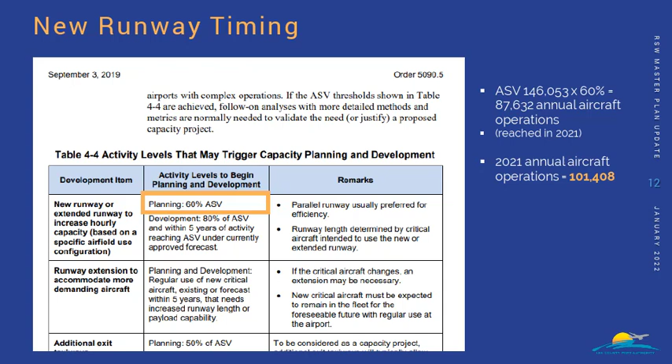The airport previously exceeded that level between 2005 and 2008 before activity dropped as a result of the last recession, airline consolidation, and the upgauging of aircraft fleet, which allowed each aircraft operation to move more passengers. RSW has again exceeded 60% of ASV with the highest level of activity that the airport has experienced in 2021.

Where are we in the process to prepare for a new runway? Significant work has been completed as part of the airport redevelopment program, which included the midfield terminal relocation and preparations for a future south parallel. This includes land acquisition, site preparation, environmental permitting and mitigation, and construction to support the airport's future 2-runway configuration, including a midfield aircraft rescue and firefighting facility, midfield crossfield taxiway system, and a midfield airport traffic control tower.

As we look forward to future actions, it's important to understand how activity is projected to grow into the future. Total operations are projected to reach just over 135,000 operations by 2040. FAA guidance indicates that development should begin when an airport reaches 80% of ASV and within 5 years of activity reaching ASV under the current approved forecast. It is anticipated that the airport will reach 80% of ASV in 2033 and 100% of ASV in 2043. Based on FAA 5-year guidance, development would begin in or around 2038.

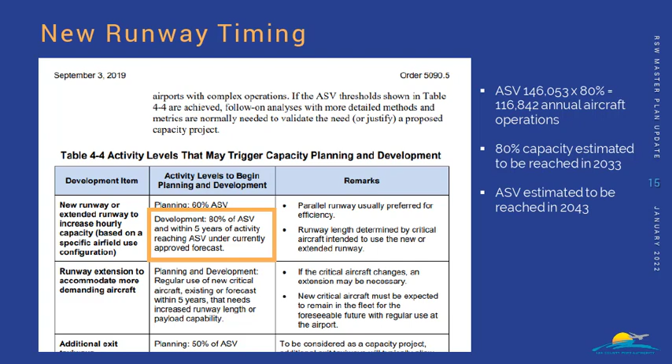Based on the projected activity levels in ASV, actions beginning in or around 2038 would include the FP&L power line land acquisition and relocation, new runway design, the new runway construction, with commissioning of the new runway in approximately 2043. Prior to 2038, there will be ongoing actions related to permit compliance and management, which will allow for the runway development to proceed when appropriate.

I will now turn it over to Pete, who will walk you through the North Area planning effort. Thank you, Mike. The planning process for the North Area's aviation use parcels helped define the near to long-term land use plan and development vision.

The North Area Plan focuses on airport property located between the existing runway and the Skyplex Commerce Park. As shown on this slide, the property currently serves a wide variety of aviation-related uses as well as airport support functions. These uses and functions include the airport's existing maintenance facilities, air freight buildings, general aviation facilities managed by PrivateSky aviation services, airport support facilities and infrastructure like FPL and electric vaults and cell phone towers, and fuel storage facilities. Also considered in this existing conditions inventory are recently sold interests granted to Capstone and Intrepid.

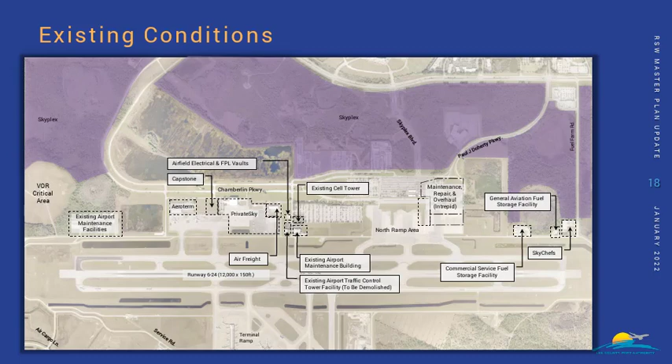As part of this planning process, we benchmarked several airports throughout the country, focusing on medium or large commercial service airports with passenger or general aviation activity levels generally consistent with the fiscal year 2040 projected levels for Southwest Florida International Airport, those which Mike just previously presented.

The airports benchmarked, denoted on this slide, include but were not limited to Nashville International, Orlando International, Minneapolis-St. Paul International, Portland International, St.

Louis Lambert International, and Tampa International airports. A few of these airports are also part of an airport system operated by a single entity, meaning these are commercial airports that are part of a larger airport system comprising one or more general aviation airports. In these sampled airports, the commercial service airport serves predominantly business and corporate aviation aircraft fleets, whereas the other general aviation airports in the system handle the more traditional general aviation operations, typically served by piston and turboprop aircraft.

One of the airports benchmarked, Orlando International Airport, focused on the West Ramp area, which accommodates a diverse group of tenants. They include a couple of general aviation fixed-base operators leasing between 17 and 29 acres of land, a couple of cargo tenants occupying between 18 and 35 acres, and a couple of maintenance, repair, and overhaul servicing facilities, noted as MRO facilities on this slide, generally comprising 26 to 27 acres.

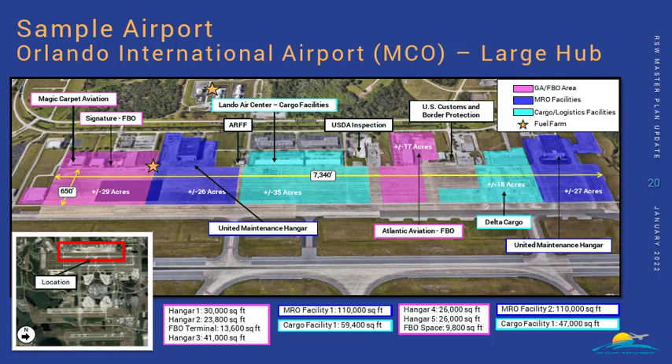This table summarizes the information collected for the various benchmarked airports. It presents the total acreage inventoried for the property or zone analyzed for each functional area, meaning cargo and logistics, general aviation, and maintenance, repair, and overhaul areas. For example, the acreages shown for Orlando International only correspond to the West Ramp. They are not airport-wide figures.

In each instance, the information presented includes the total acreage for that functional area. Also shown in parentheses are the number of leaseholds or areas included within the total acreage and the range each leaseholder area comprises. We also included an e-commerce category and benchmarked Amazon's Lakeland and Chicago Rockford operations areas.

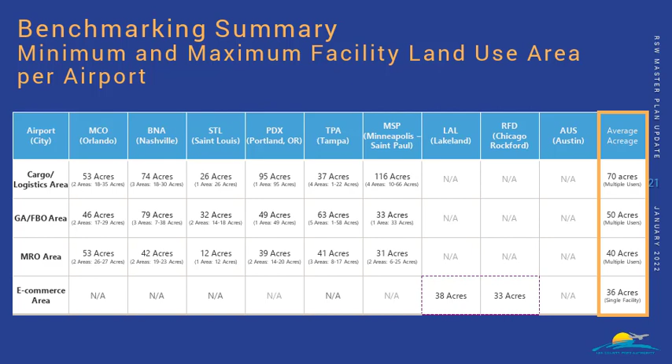The combined results of this benchmarking effort are summarized on the far right side of the slide, outlined in the yellow box. The average acreages for each of these four functional areas are being used in the North Ramp analyses as the minimum acreages that should be preserved to support future development by a single or multiple tenants or operators.

In addition to the minimum land use planning targets shown again in this slide on the far right-hand side, we also collected general planning metrics for the sizing of buildings, aircraft parking aprons, and landside support areas for trucking operations and staging, as well as vehicular parking. These general planning metrics were used to develop representative layouts and a development vision for the North area based on the preferred land use plan established for the North area.

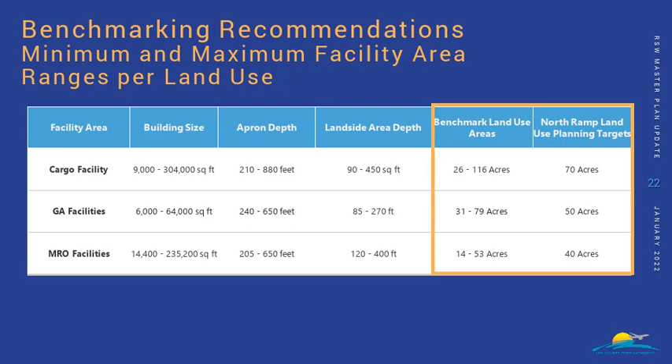The recommended vision plan for the North area represents an efficient layout that balances facilities with supporting airside, landside, and logistics or support spaces. The far ends of the site illustrate further growth opportunities for cargo and MRO development, but require wetland or stormwater system mitigation in order to support development of those sites.

The ultimate development of these parcels will likely vary and will ultimately be determined by the lessees of each parcel. However, the vision plan helps define the boundaries for the various land use zones proposed in the recommended land use plan.

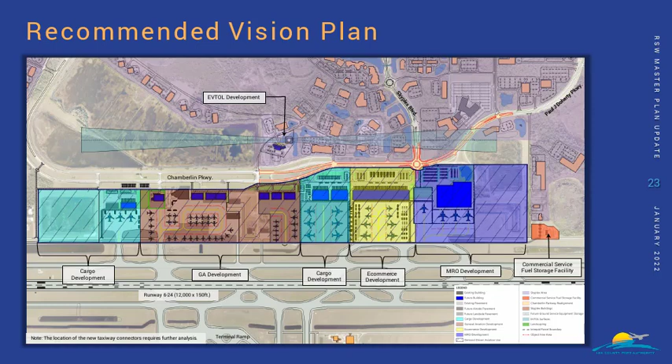Following the formulation of several land use scenarios and multiple work sessions with airport staff, a recommended land use was identified. The recommended plan fulfills the overriding goals previously stated and supports an incremental development plan that seeks to efficiently utilize the property. However, it is important to recognize that this recommended land use plan is intended to support decision-making for airport staff as emerging leasing opportunities arise. It is possible that some adjustments or refinements to this land use plan are necessary to enable emerging leasing opportunities, while still aiming to preserve efficient use of the property as further future development materializes.

The recommended land use plan protects for 2 zones totaling 82 acres for cargo development, approximately 80 acres for general aviation expansion and new development, 70 acres for MRO development, and a 44-acre land use parcel for an e-commerce operator and its logistics support functions.

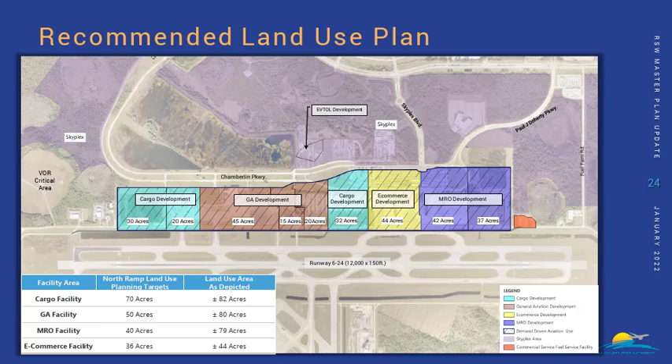I will now turn it over to Darren, who will walk you through the terminal gate planning process.

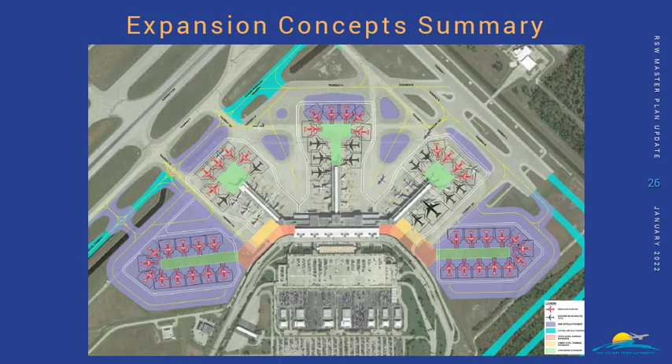In order to evaluate the pros and cons of these alternatives, we developed a matrix comparing them using 28 different criteria in 4 different subcategories. A summary of the results of this evaluation matrix is shown on this slide. The Concourse A and E alternatives ended up scoring much higher because they don't result in operational impacts during construction, do not result in loss of gates during construction, and result in lower overall cost and faster construction schedule.

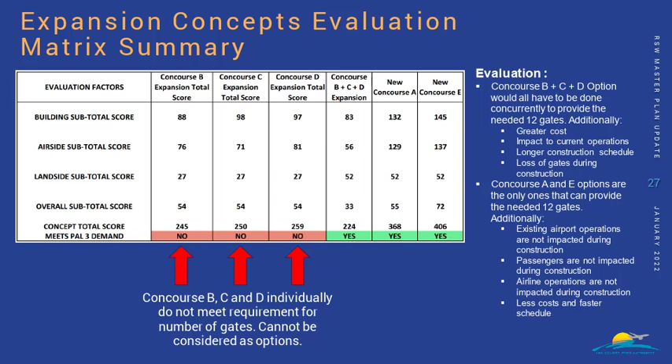To recap the summary recommendation from our presentation in November, the analysis indicated we should plan for enough additional gates to satisfy the peak hour demand in the average day of March in 2035. Both the Concourse A and E alternatives can meet this requirement and score well on the evaluation matrix, but Concourse E is preferred based on a shorter taxi distance to the existing runway, the proximity to the existing utility infrastructure and chiller building resulting in lower overall cost, and the alternative doesn't have potential impacts to International Gate B1. The final number of additional gates needed to meet the 2035 demand was subject to additional analysis and evaluation.

One of the criteria still subject to further evaluation was the impact of anticipated changes in the size of aircraft serving the RSW market, or the fleet mix, as it is commonly referred to in airport planning lingo. The aviation industry is facing the aging out of Boeing 757 and 767 aircraft, also referred to as ADG or Design Group 4 aircraft, as they reach the end of their projected useful life. This is estimated to occur within a few years of the opening of the new concourse at RSW.

None of the major commercial aircraft manufacturers currently have a replacement aircraft on the books that would fall into this same Design Group 4 aircraft category, so we anticipate that these aircraft will be replaced by the airlines serving RSW with smaller Design Group 3 aircraft, and in some cases larger Design Group 5 aircraft. As a result, we are recommending that the taxiways and taxi lanes providing aircraft movement around the terminal area continue to be based on the larger Design Group 5 aircraft, but the layout of gates on the new concourse should be based primarily on Design Group 3 aircraft.

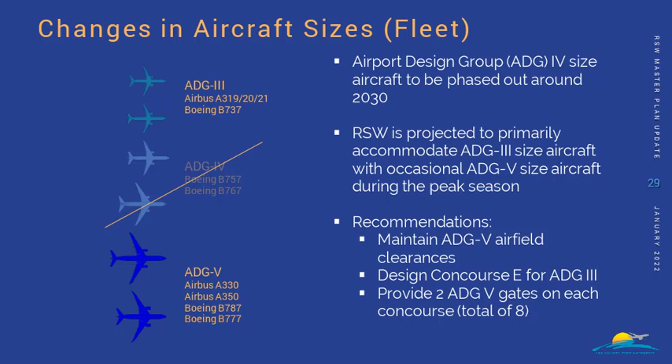At the time of our presentation in November, the team had initially recommended the number of additional gates to meet the 2035 demand as 12, more or less. Based on additional analysis, the current recommendation is to plan and design the new concourse for an additional 14 gates. This is based primarily on the anticipated mix of preferential use versus common use gates on the new concourse. The higher the projected percentage of preferential use gates means the greater number of additional gates that would be required to meet the demand. The estimate of 12 additional gates assumed that all new gates would be common use.

While the trend at RSW is toward more common use gates, it was determined that a 50-50 mix of common use versus preferential use gates on the new concourse is a more realistic projection, given our current mix is 67% preferential and 33% common use. Since the estimated cost per new gate as an allocation of the overall estimated project cost is approximately $40 million, it's important that we carefully consider the number of new gates that are required.

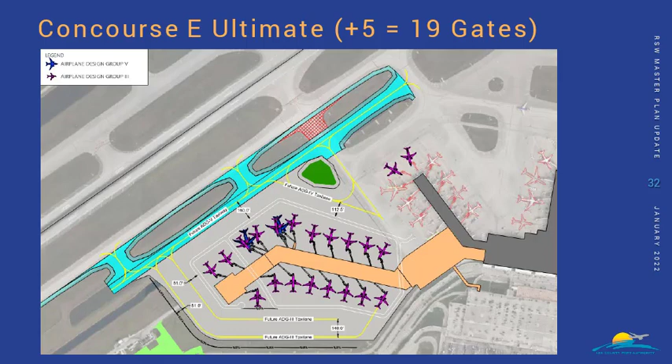During the design process for the initial 14-gate phase of Concourse E, the design will incorporate features to facilitate the future expansion of the concourse to 19 gates, with a focus on minimizing waste or rework and impacts to operations during construction of the expansion.

Following our additional analysis, we have concluded that the addition of 14 gates in the form of a new Concourse E is a reasonably conservative target to meet the demand for March of 2035 at RSW. Based on the estimated completion date for the new concourse, the 14 gates should provide capacity to meet projected demand at RSW for an additional 8 years beyond the opening day of the new concourse.

Keeping in mind the peaking characteristics for passenger traffic at RSW, the 14 gates should provide sufficient capacity for all but 15 days in March, or more than 95% of the days in the year of 2035.

Based on current forecasts, for the rest of 2035 and the 8 years prior post-opening of the new concourse, the number of gates available should meet or exceed aircraft parking demands.

There are a number of factors that could impact this capacity versus demand, such as the actual number of common use versus preferential use gates on the concourse, or the actual growth rate of passenger demand at RSW between now and 2035. These factors could either delay or accelerate the need for additional gate expansion to meet the demands projected beyond 2035.

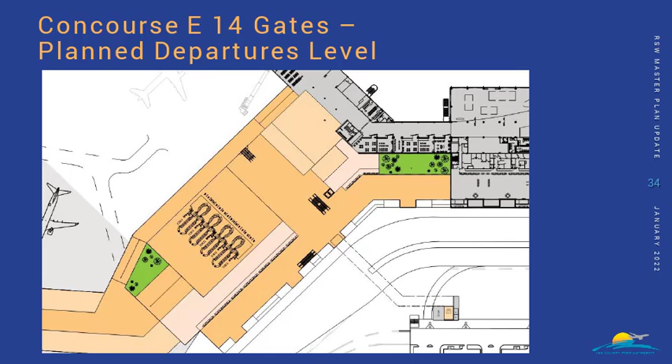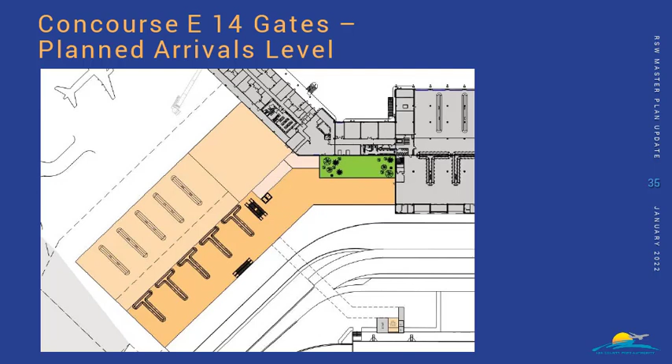The additional lanes will extend to serve the new terminal area for Concourse E, and there may also be improvements needed in the area prior to reaching the current terminal, which is the area in front of the future anticipated Concourse A. These improvements may be necessary to help ease congestion on the approach to the terminal area and allow vehicles to spread out into the additional proposed lanes. The extent of the improvements needed in the area in front of future Concourse A will be based on a few factors, such as construction phasing and the cost benefit of making these improvements now versus later.

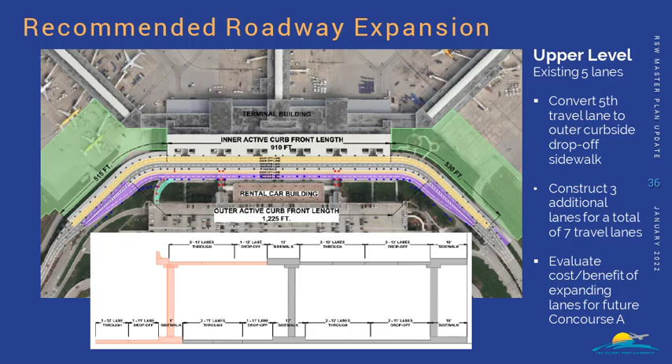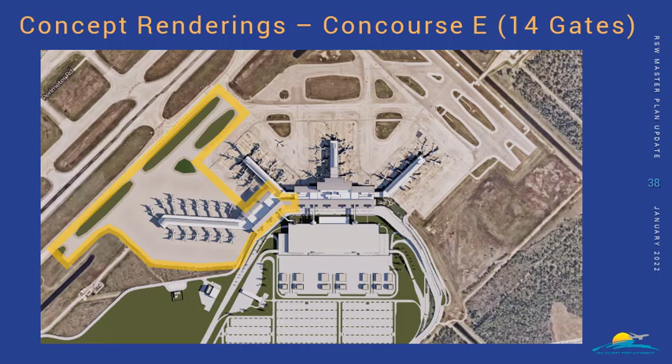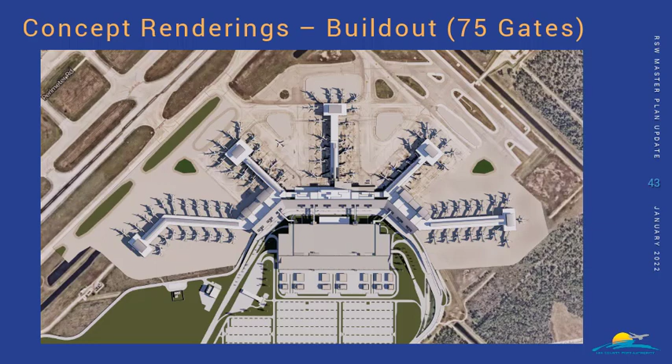Thanks, Darren. As we move forward into late 2022, we'll be preparing the facility requirements, alternatives analysis, environmental overview, and initial airport development recommendations. There will be an additional opportunity for stakeholder and public comment at that time.